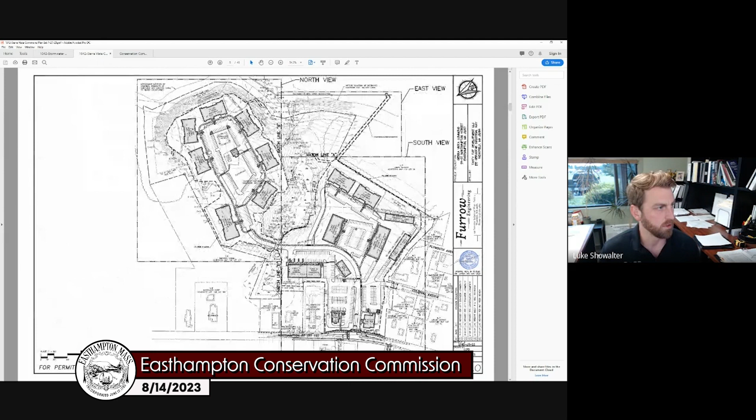So that space was converted to green space, which includes grass lawn and some additional trees. We also removed one of the residential buildings entirely. The building that was back here in this area was removed completely, as well as all associated paved areas, including the driveway, the parking, and the walkways. It also eliminated the need for the stormwater basin that was back there as well.

And since this was one of the areas that would have needed to be cleared for development, eliminating this building contributed to the reduction of tree clearing by 1.3 acres. So that's 1.3 less acres that will need to be cleared.

Although we removed a residential building, the number of proposed residential units for the entire project didn't change. Half the units will replace the retail space that was removed from building 14. The other half will be added to one of the proposed residential buildings over in this area on the eastern side of the project. As you can see, the footprint increased on that building accordingly.

The 3 residential buildings to the east were moved. These 3 buildings here were moved 10 to 15 feet further away from the adjacent slopes. Also, initially there were 2 restaurant pad sites proposed on Northampton Street, two 5,500 square foot pad sites. Now one of those sites, the northern site, is proposed to be a 3,200 square foot bank use. So there was a reduction in retail space there as well.

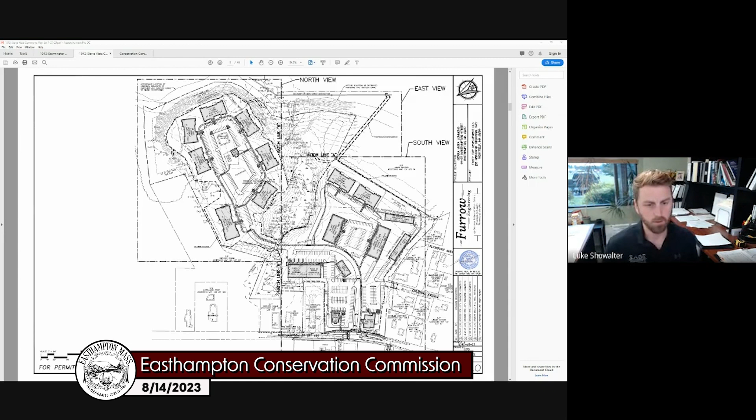So those were all the changes that were made over a month ago. As a result of the peer review, in general there were no significant changes to the plans or the stormwater management system. The only change of note would be that basin R1 was reduced in size. I'll pull up that one.

This basin over here was reduced in size in order to move it further away from the adjacent slopes. That's the only major change of note. I wouldn't call it major, but it also reduced the amount of tree clearing necessary in that area by 5,000 square feet, which isn't too significant, but it's something.

As Matt mentioned, we received a second round of comments from Beals and Thomas late last week. A majority of the initial comments they had seem to be addressed by us. We have reviewed their remaining comments, and we believe them all to be addressable without any substantive changes to the plans. We're currently working on putting together a response, and we anticipate having all their comments addressed within the next week, hopefully.

Thank you. I had some specific questions looking at the most recent August 9th letter. Comment number 2 deals with the Manhan River being a cold water fishery resource and the critical areas criteria. It's noted that the applicant's response and revisions meet the requirement of DEP Stormwater Standard 6. Can either of you please clarify what the revisions were that addressed that?

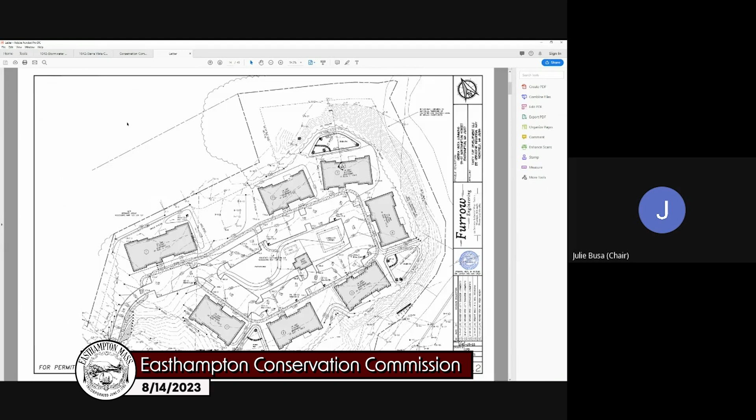That standard has specific pre-treatment requirements. I guess the project has had a couple iterations. If that was an initial comment, I think in the most recent stormwater plan, they have the required pre-treatment before they're infiltrating. I guess we had always seen that, so the initial nature of the comment from DEP, kind of unsure what they were looking for. But in our opinion, they're meeting that standard 6 with their current design.

Okay, so there was no change. Not a substantial one that I'm aware of, no. Okay. Once we got involved, I don't know if there was a change to a previous iteration, but since we've been involved, it seems like it's been compliant.

On comment number 4 regarding the tree line perimeter sediment controls, your initial comment, Matt, said that Beals and Thomas could not accurately evaluate the proposed impacts to resource areas and buffer zones, and were holding further comment on impacts until additional information was provided. Did you have further comments once that revision was made to show the limit of work and perimeter sediment controls? No, we're all set with that now. I guess the initial limits were unclear, and now the limits are more greatly defined. We're comfortable with it.

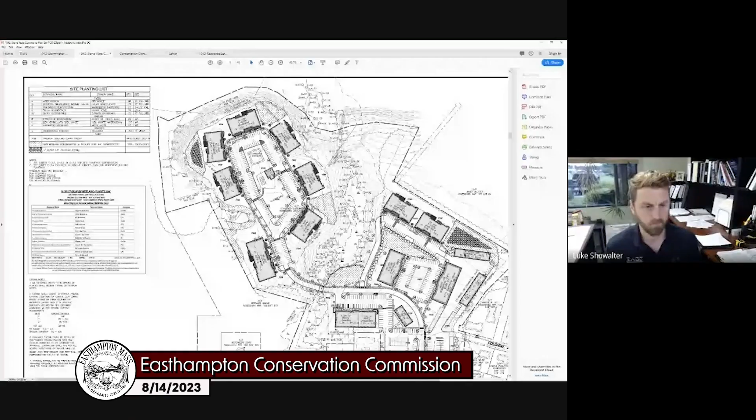So this change was in response to one of the Beals and Thomas comments. It's only in the area of the bottom of the infiltration basins, and I believe it was to aid in infiltration. It's a 4-inch layer of 1.5-inch crushed stone. This is that hatch, this is what it looks like. On the plan, that crushed stone is located just in the bottom area of this infiltration basin, as well as over here in this basin.

So that's the only area that you're placing crushed stone? Correct, yes. You're suggesting that in lieu of planting? Previously that was a grassed area.

So the crushed stone, Beals and Thomas suggested that it should be crushed stone, so that's why we made that change, so that it's replacing the grassed area at the bottom of the basins.

Yes. Was that the intent, Matt, or were you suggesting that should be a layer underneath the soil media and plantings? Yeah, I'm not recalling making that comment off the top of my head. Trying to buzz through these quickly here.

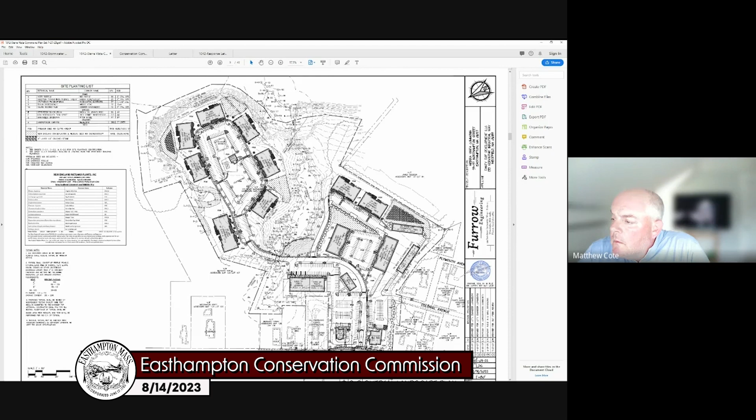I mean, typically what we see in these basins is it's hard to get vegetation to establish, so the fact that they could have a stone base could be beneficial instead of it always being mucky. It would be something more stable.

It was actually in response to comment 15A, out of the Easthampton ordinance. So that's not necessarily a comment or suggestion we made, it was keeping in line with your ordinance.

Or with clean stone or filter fabric. Usually there's a layer of ground fabric or stone, and they chose to go with stone. Typically, though, that would be...

When I've seen similar designs, certainly if you chose filter fabric, it wouldn't be on the surface, it would be a layer underneath. I assume the same was intended for the stone, not that it would be the finished surface, but a layer to allow for increased infiltration and pore space underneath the finished surface. We're happy to look into changing that.

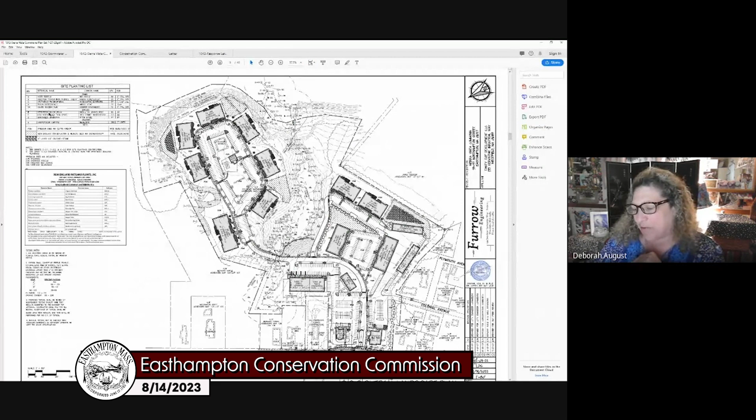You switched out the tufted grasses, which we thought could be invasive, and replaced it with blue joint grass. But the botanical name belongs to big blue stem grass, and the common name belongs to a separate botanical name. So are you doing big blue stem, which is Andropogon gerardii, or blue joint grass, which is Calamagrostis canadensis? You have two different types in the one line.

So which will you be using? This is another species straight out of the Mass DEP Stormwater Handbook.

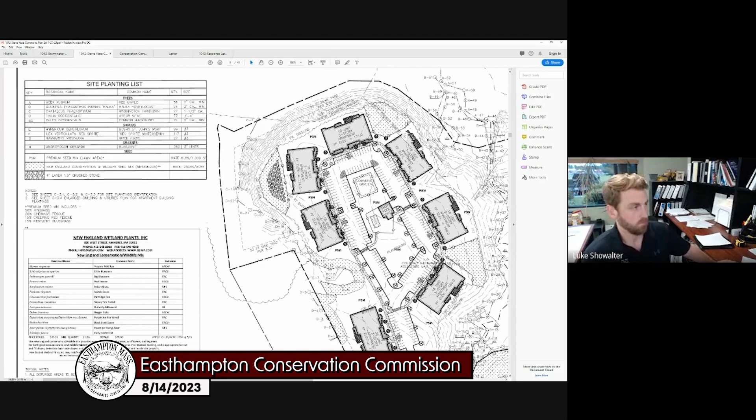It calls out that botanical name and blue joint. Maybe it's a mistake, I can look further into it, and I would imagine it's the botanical name. But we chose this one specifically because it was native. It has higher salt tolerances, and it's good for wildlife. But I can clarify that and get back to you. So you'll let us know if it's the big blue stem or if it's the blue joint?

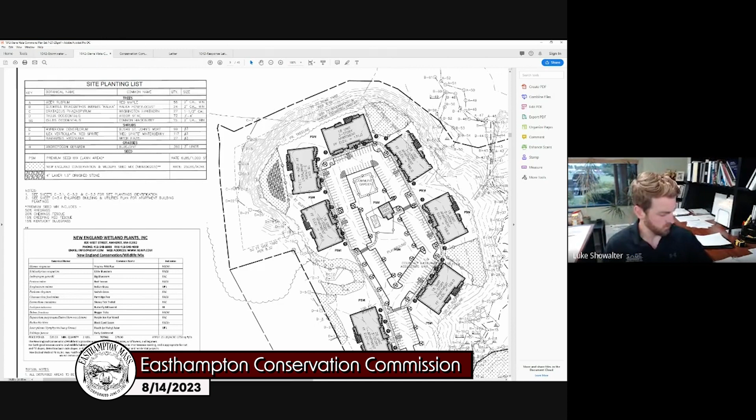Yes. Okay, thank you. That was it for my questions. Okay, thanks Deb. With that, I'll open it to questions or comments from the public.

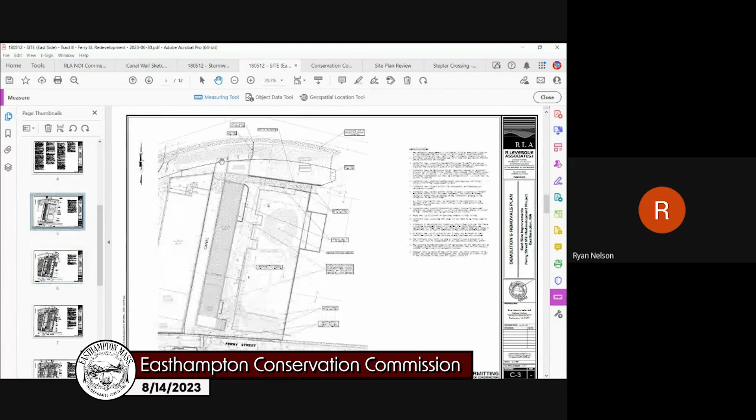So as Julie said, Ferry Street Mills, this is the east side referred to as Tract 2. Tract 1 has been completed and we got a certificate of compliance for that a month or two ago. For Tract 2, we're proposing the demolition of the existing building along the canal. There's also a lot of debris on site and various stockpiles of material that's going to be removed. Before I go on, there's, as everyone knows, a canal that bisects the site. This would be Tract 1, the west side, and Tract 2, the east side.

So previously, under the last notice of intent, we were proposing to replace or rehab the building along the canal, but that's no longer the case. The plans have changed. The building along the canal will be demoed, and a new 75 to 100 unit residential building will be constructed farther to the east on site.

And the way that's going to work is, if we look at the grading sheet here, the entrance from Ferry Street will slope down. You can see these proposed grade contours sloping down along the building and then wrapping around to the canal side of the building, where there will be parking available as well as parking underneath the building. Due to the elevation changes on site, there's a couple sets of retaining walls that are proposed.

There's a retaining wall located along this eastern edge of the parking, and that's going to provide for a pedestrian path to connect Ferry Street to the existing bike trail at the rear of the site. So this is going to be an elevated but still sloping path above the parking or drive aisle that's going to connect Ferry Street to the bike trail. And then we also have retaining walls proposed over here between the lower tier parking area and the front entrance.

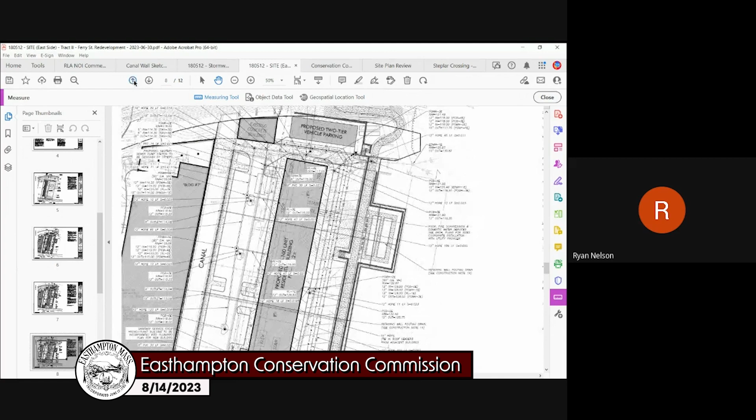Jurisdiction wise, we are within the buffer zone to the canal. Let me find the sheet that shows it. The 100-foot buffer zone line pretty much goes down through the middle of the tract 2 site. So the proposed building is partially located within the buffer zone, the parking area to the west is in the buffer zone, and this side of the property would be out of the buffer zone.

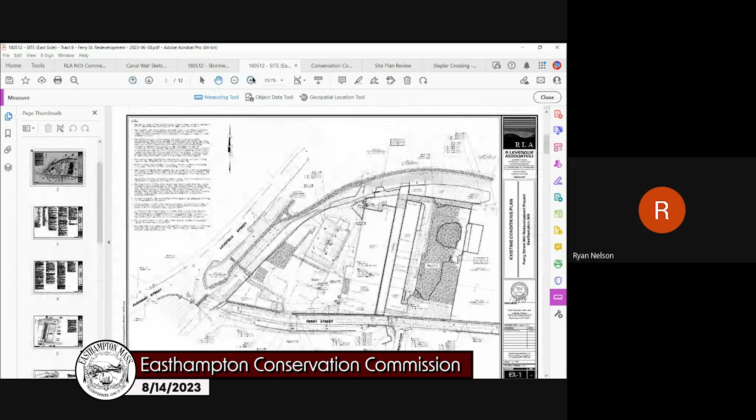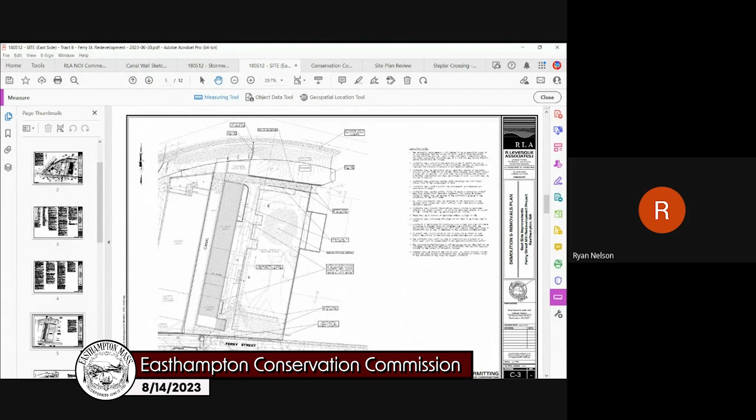The site is also within bordering land subject to flooding. I believe the elevation is 122.3, but I can confirm. Yep, the 100-year flood zone elevation on the 88 datum is 122.3. Similar to the previous proposal, we are taking account or credit for the removal of the existing building, since that was in existence well before the FEMA flood study.

Due to the grading on the site, we are proposing a cut to existing grade on the majority of the drive aisle and especially the wraparound at the back, in addition to the drive underneath the building that's going to be open, so floodwaters could enter that. We're creating a net surplus of comp storage on site. So not a whole lot of changes in terms of how much we're developing, or flood zone impacts, or buffer zone impacts, just a different reconfiguration of the proposed building and where the parking on site will be. Happy to answer any questions you guys might have.

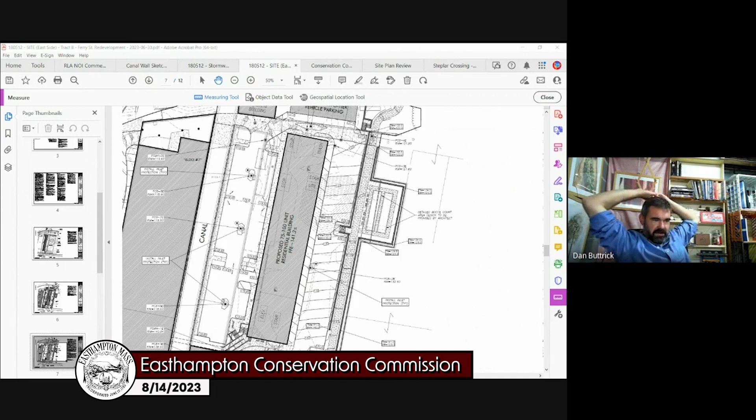So last meeting, the one question I remember walking away with was that right now there's the two buildings close up against the canal, and moving the building away will increase sun penetration down to the canal somewhat. So we're just wondering if there could be a way to squeeze some trees in along the canal edge, recognizing that there's really not much space at all with the way everything has to lay out there.

Right, no, that's a good question. Yep, that was one of the comments Cassie had sent over a few weeks ago, and I'll read RLA's response to that.

Cassie's comment to us: consider and speak to the possibility of adding plantings along the wall of the canal that will be newly exposed, to try to offset the loss of shading to the canal water from the building removed. Either propose some plantings or explain why this is not feasible.

RLA's response: the canal is incised approximately 15 feet below existing grade, and some shading will still exist under proposed conditions. The anticipated increased sunlight exposure of the canal due to the removal of the existing building will be mitigated by the construction of a proposed multi-story building, which will be shifted approximately 70 feet directly to the east. The canal goes through a historic mill complex, and the canal is concrete and does not contain a natural substrate. Therefore, efforts to provide shading are not anticipated to have the same benefits as compared to a natural stream corridor.

Additionally, proposed tree plantings along the top of the canal wall pose a risk of long-term structural damage through their roots, exploitation of potential cracks and voids in the existing wall, and the proposed sidewalks. In lieu of planting trees, the applicant has proposed to install hanging planter baskets along the top of the canal wall ornamental railing.

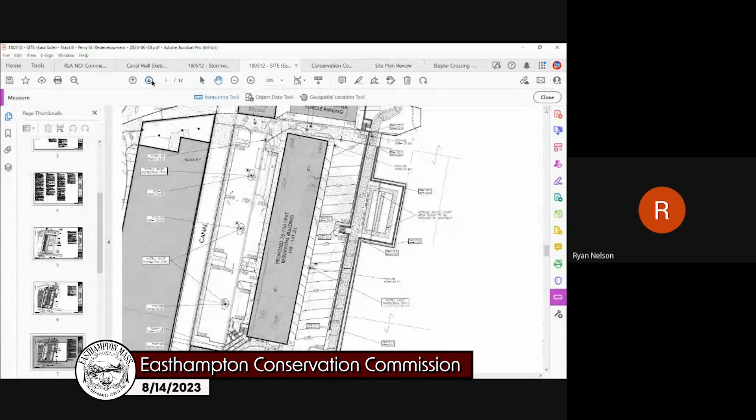Thank you. And you are showing some trees in those little parking lots. A couple on the parking islands, yes. Yep, yep.

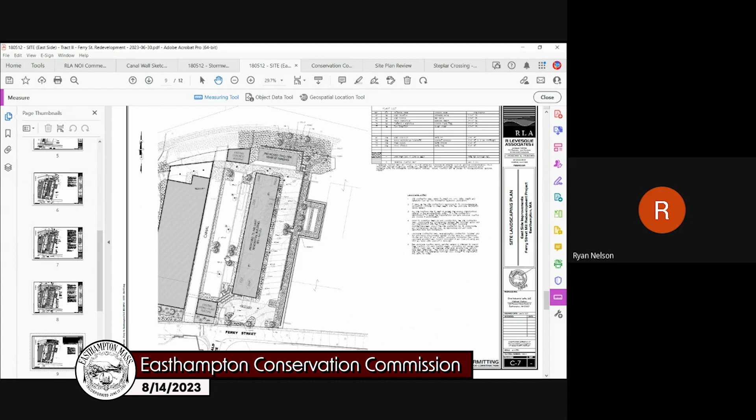Why are those trees not a concern relative to the structure of the wall, but others along the canal would be? We have to meet parking standards, and I believe that's a requirement under typical site plan review for parking. That didn't answer my question. Yes, they would pose a risk, but we're trying to minimize the risk by only providing what is necessary to satisfy zoning.

Plus, they're as far away from the wall as possible, it looks like. Correct.

Is that really 15 feet from that elevation down, because it's hard to get a sense of it from looking at the site. Yeah, the bottom of the canal is like 103.6 or 7, and proposed grade will be 120 point something. So it'll be actually more than 15 feet under proposed conditions.

Did we talk about whether repairs or maintenance to the walls are being performed as part of these projects? I don't remember. Mike, are you available to speak to that?

Yes, both sides of the interior of the dam of the canal walls will be repaired. Those are stone masonry walls or concrete walls? They're granite foundations from the concrete bottom. Obviously it's probably well below the concrete bottom of the canal. Up about, it varies on each side, but they're probably 10 to 12 feet. And then there's a combination of concrete and brick.

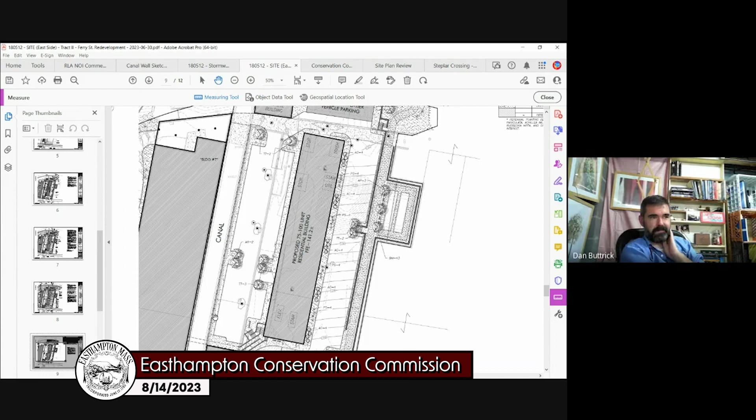I believe in the original approvals we had required some, I forget if it was netting that we landed on, but we had some protections for capturing anything that would fall into the canal. Is that still part of your proposal? We cannot use netting. That won't work because it's a concrete bottom.

We're basically going to shut the dam off. We're going to shut the water off so that we can get in there and clean, because there's about 150 years worth of rubble and brick and steel pipes, and we're going to completely clean everything that's in there now, clean it out.

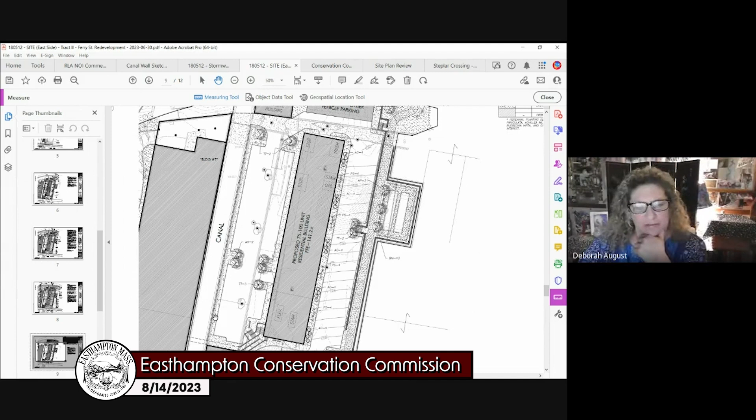Is that something that was discussed at the last meeting? I don't think so. No, I don't remember discussing that. I think there was a discussion about cleaning the canal many meetings ago, cleaning out some of that debris, but I didn't hear anything about stopping the water and driving in there. That's all.

Yeah, the idea is in the fall, if we can coordinate this correctly, that's when the water is the lowest and the slowest throughout, coming over the dam and in the canal, and that's like the prime time to be able to do that work. How has that been accounted for in your impacts analysis?

Mike, am I correct that you have control and ability to control the water level of the dam or the impoundment area? Correct. So in our deed, we have drawdown rights, hydroelectric rights, water flow rights, and a handful of others, because we own the majority of the pond, and the other part of the ownership is the city's. Gotcha.

So would you anticipate on a demolition day you would cease flow, work on demoing the building, and then clean as necessary, and then resume flow? Or are you expecting it to be done in one shot, or how long would it take? No, I mean, it would take some time.

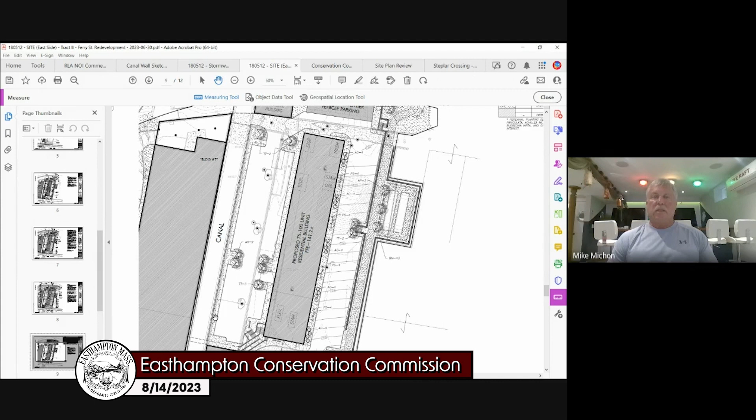So what we would do is either use some sort of pump system to divert the water around our canal area and basically go around the site and come back in where the bridge area is. Or we would use an ADS pipe and let it run independently from the dam along the inside of the canal, then flow out again beyond where the bridge is. Okay.

And are those temporary impacts to the resource areas currently reflected in your calculation of impacts? Because I don't think anything that dramatic was proposed or approved under the prior NOI.

We haven't, you're referring to impact. I guess I'm just unclear as to what. Dewatering is considered an impact, regardless of whether it's temporary, and you're proposing to dewater the entire canal, it sounds like. It's not dewater, it's diverting. It's dewatering for the purposes of our conversation and permitting process.

Just as if you were to draw down the pond to dredge it, that would be dewatering. You'd have dewatering impacts for the entirety of the area of the pond. Okay, so would the commission be looking for a dewatering plan or flow diversion plan, or just additional detail on that? We would definitely need to see a water control plan, but you're also going to need, if it's not already in your tally of impacts, to update your impacts, because your assessment of resource impacts is not accurate if you haven't accounted for that.

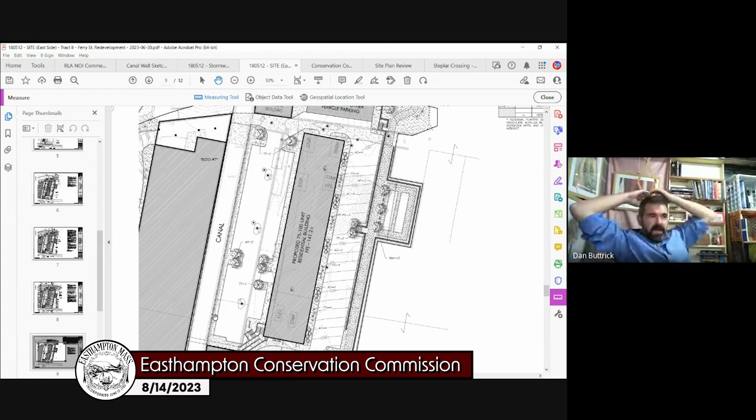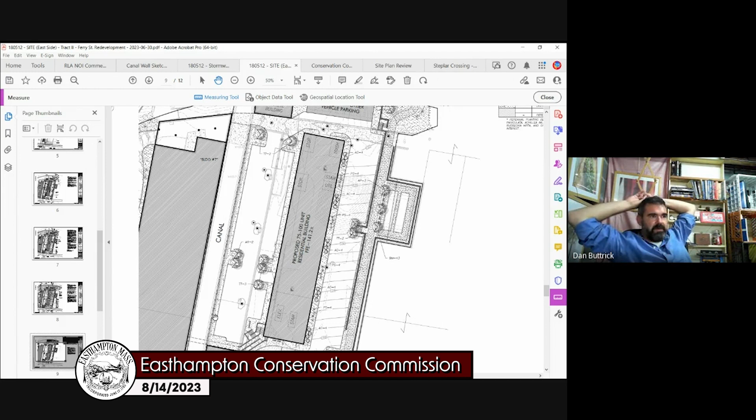And there's a lot that raise a lot of questions too, like on the other side of the rail trail, it's all endangered species habitat. So, not to, once you get out of the canal to the other side, change the water flow regime. I just don't know what the species is. I don't know what the other inflow sources are to that area. That would all need to be coordinated.

Well, we'd still be discharging within the canal, just past the building demolition area. There's a possibility too. How long is that length of canal? Maybe, I think the building's what, like 300 something feet, so the canal's probably 400.

You're probably also talking about tripping the 500 linear feet of bank threshold for MEPA by doing this that way. How are we disturbing bank? Because if you're dewatering the bank, I think they would consider that temporary impacts to bank.

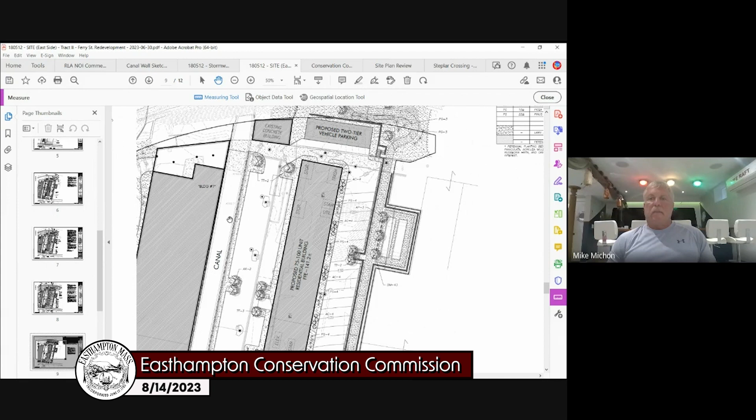I'd have to think that through more, but I think that's how it has been interpreted in the past. Yeah, having been forced to go through MEPA several times for things that I did not think would have had MEPA issues with. Anyway, I think you'd have to look at David Follis's previous assessment on this, because a canal has a whole different, especially with a concrete bottom, is looked at differently.

The fact that it's concrete does not matter. It's still considered land underwater. It's still considered bank. The previous determination made was that it would not be considered perennial and would not have a riverfront, but that doesn't change any of the things we're talking about.

Trying to remember my discussions with DEP on this a couple years back when this was originally getting permitted. Some of the pathways that DEP suggested were that, I don't have the language right in front of me, but off the top of my head, I remember the way it's worded. If you look at performance standard thresholds for land underwater or bank, if you exceed those thresholds, usually it requires a wildlife habitat analysis unless the commission deems the resource area is insignificant.

So that would be our approach in this circumstance, if that was considered a resource area impact. That still wouldn't get you around the thresholds that you'd be tripping for MEPA or the need to report them as impacts. We can't change any of that, regardless of whether we think it's significant or not. And frankly, I don't know, particularly because of the downstream habitat issues that Dan mentioned.

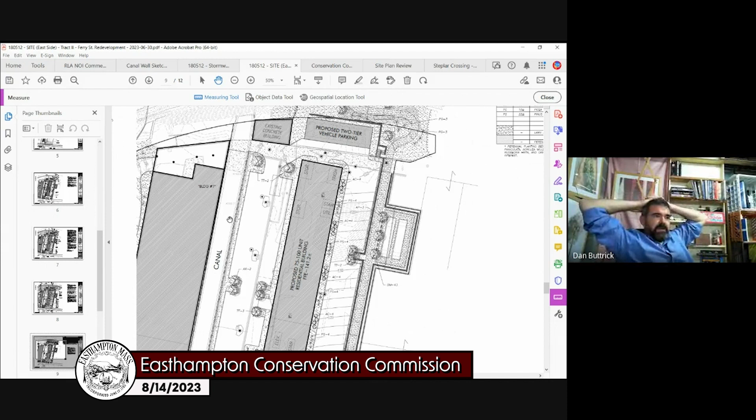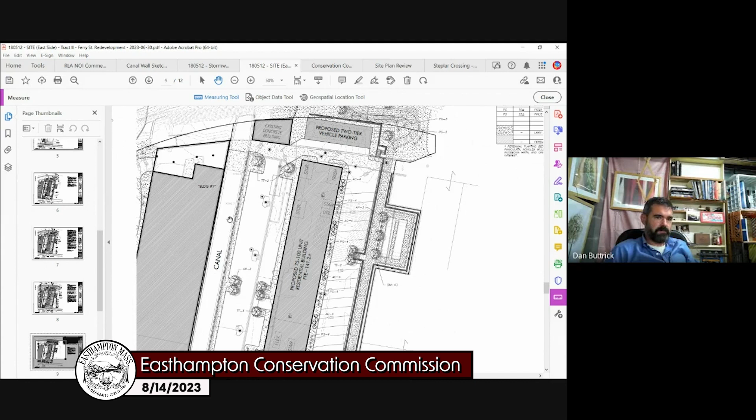Yeah, I guess if you're diverting, just kind of diverting and then discharging, like at the downstream end of the canal, maybe that concern goes away. But that just does raise a lot of questions. Yeah, this is the changes you're proposing on the surface, I think, are not of significant concern by and large. But this is a significant change that we had not permitted previously or discussed previously.

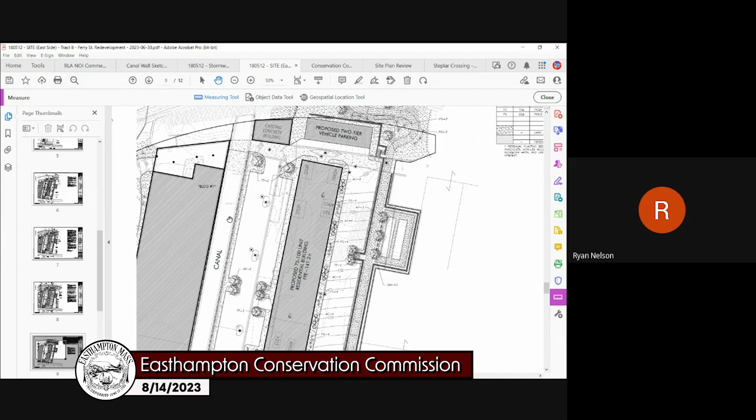Okay, so I'm just trying to get a grasp for what the commission is looking for so we can provide more information. You're going to need to recalculate your resource impacts, thinking carefully about what does and does not apply, and then see if you trip MEPA. If you trip MEPA, you're going to need to go through that process, and so on. But the first step is going to be recalculating your impacts and describing what that process is going to look like so that we can all reflect on it fully.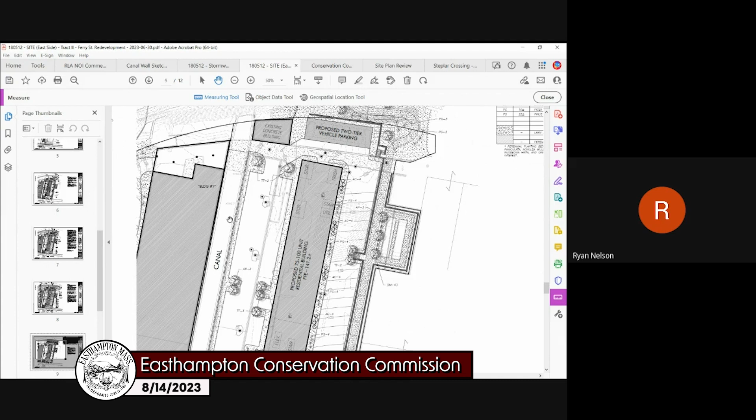It's our opinion, the resource area of bank and land underwater, we believe to be, I know the commission decides, but our argument is that it's insignificant. There's no habitat, there's no wildlife or. It doesn't matter, Ryan. It's still a resource area under the Wetlands Protection Act. We have no authority to change that. Canals are treated differently, but they're not excluded as resource areas.

I mean, yeah, and having not seen it, if it was a concrete bottom, but it was covered with the accumulation of a lot of material over the decades, it may be serving, or maybe providing some kind of benefit, even if it doesn't look good and is junk. Right.

Do you want to take some time to think that through and we can continue? Sure, yeah, I'll have to do some more research on that. Was there anything else that folks wanted to discuss about the project tonight while we're here, or shall we just put it on hold?

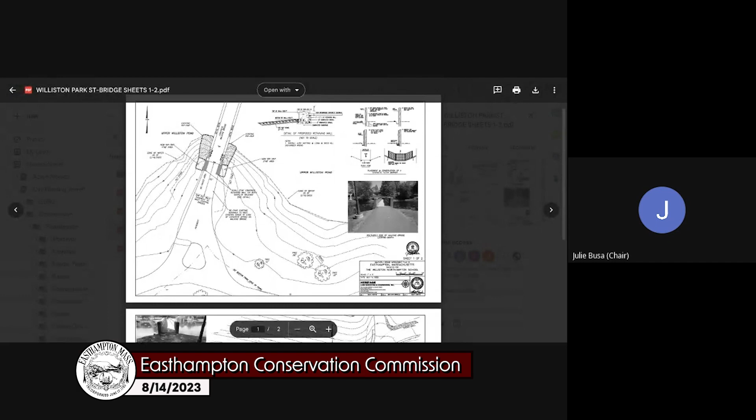Yes. Okay, Mark, you want to start with sheet 1 or 2? Sure, yeah, sheet 1's great. So, thank you, Cassie. I'm not sure why mine's not working, but so this is, sheet 1 is showing the existing sidewalk, which is located on the southerly side of the pond. And the issue is twofold.

One is there's a major tripping hazard as you go from a transition between the bituminous concrete walkway and the concrete surface of the bridge itself. On either side of the bridge, there is currently failure of part of the sidewalk in small areas on either side and erosion from major storm events on either side.

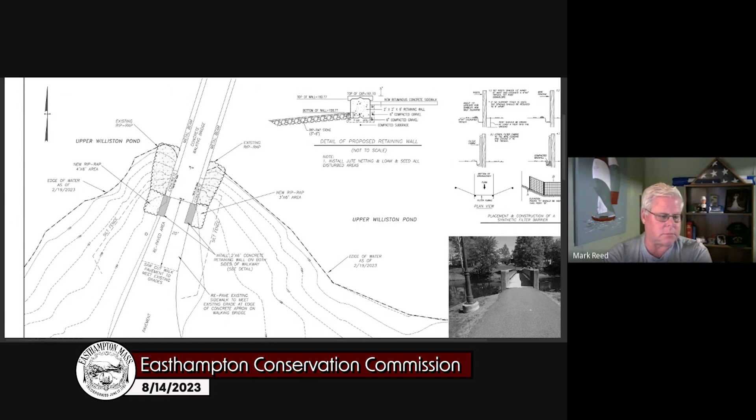So on the south side, we are proposing to install 2 foot wide by 6 foot long concrete retaining walls with a cap. They're kind of shown in the hatched area on either side. Then saw cutting and removing the existing pavement for a distance of 20 feet on either side of the outside edge of the retaining wall, there would be riprap proposed.

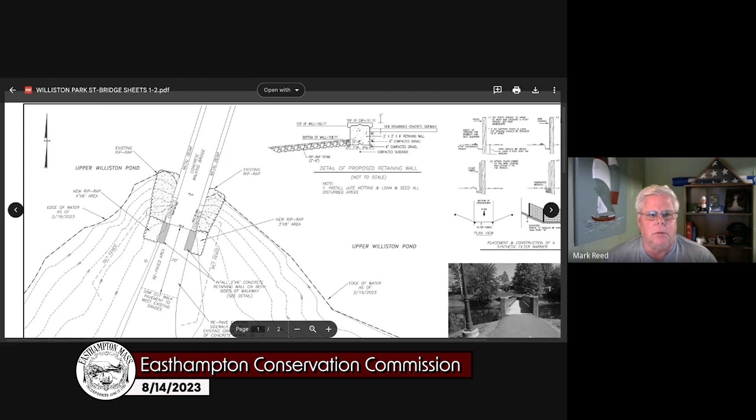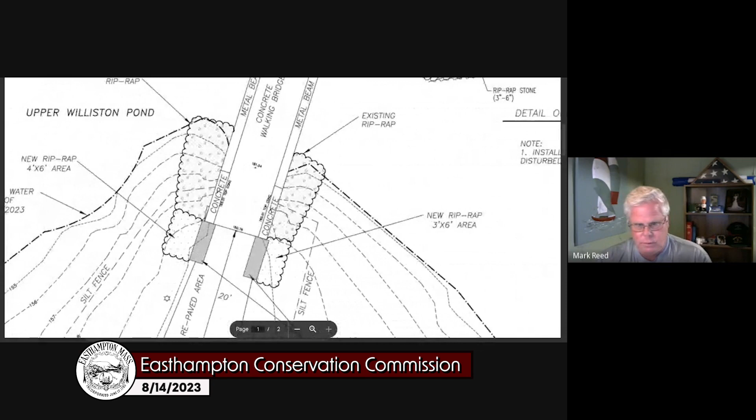And all the areas that are disturbed during the construction would be reseeded and maintained. We are proposing silt fence to be installed in the perimeter to ensure that during construction no erosion occurs. And if you can zoom in the picture, you can kind of see in the lower corner there, we inserted a picture for you of what we're talking about. You can see how both edges are really rounded.

We had a meeting with Hal and Cassie out there, and I know Cassie has a couple additional pictures, but you can see how over time that asphalt walk has just settled. So we want to try to reduce the tripping hazard and fix the long-term erosion. And you can see how the grade drops off on either side.

On the north side, if you switch to the other plan, similar to that, we are not proposing any concrete retaining wall, but we are going to repave 20 feet of the walkway.

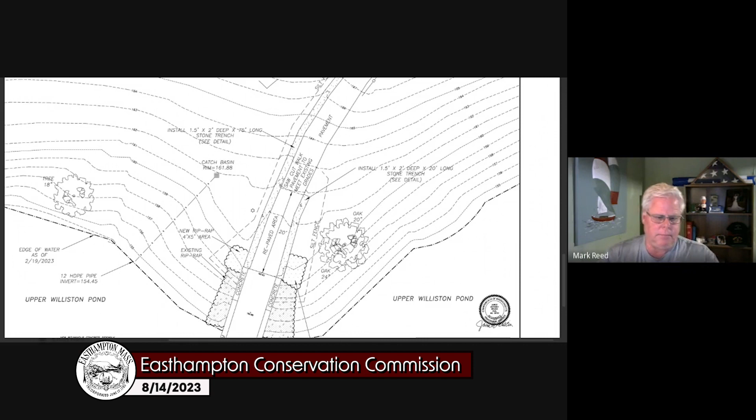But on this side, because the grade is such, we're going to install a 1.5 foot wide, 2 foot deep stone trench. On the right-hand side of the plan it would go for 20 feet, and on the left-hand side there's a steep slope you can see by the contours. It would continue up until where the sidewalk splits, shown on the very top section of the plan.

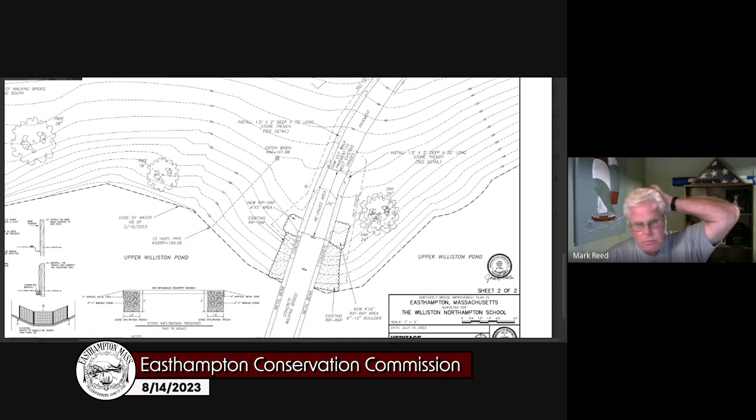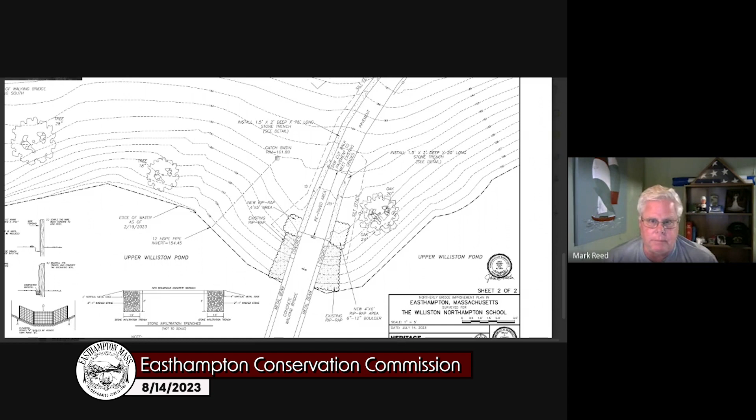In addition, we're going to put riprap and some large boulders, 6 to 12 inches in size, to facilitate slowing down any water that comes down the hill. It's quite a steep slope coming from the building on the upper section, and installing that and adding riprap to that area will stabilize everything.

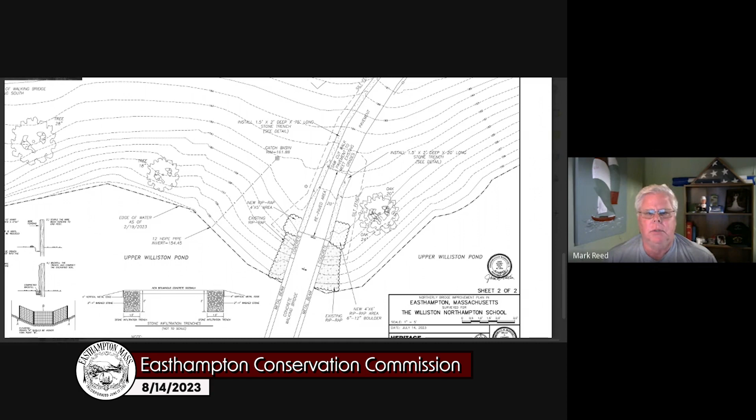Again, silt fence would be proposed during construction, and the rest of the walk going up from the 20 feet is fine. There's no issues with that, it doesn't need to be repaved.

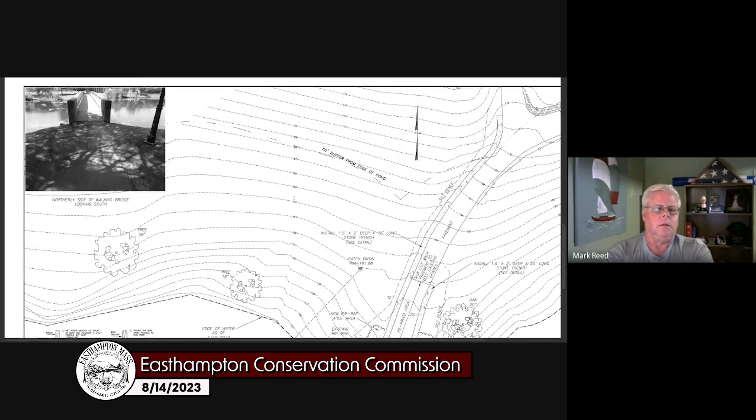Again, the upper left-hand corner of the plan shows a photo of it coming down the slope. Not a great picture, but you can see how the blacktop is failing and there's a tripping hazard at the concrete as it enters the bridge.

I'm sure Cassie has some nice colored pictures too that she could share, which would lend itself better than black and white. Yeah, I can share those whenever the commission wants.

Hey Mark, did this come before the commission before, or was it just... I remember, I swear, like 10 years ago it maybe was coming up as a problem, but it was like something in the future. And now I guess it's the future. Did we permit something? Correct, we had an informal discussion with the commission. I don't know, maybe it's been 10 years, Dan, I'm not sure, but yeah, it's finally gotten more to the forefront to try to fix it. So yes, it may not have been 10, but it was like more than 5. Yeah, it's less than 20. So it's an ongoing condition they would like to try to get resolved.

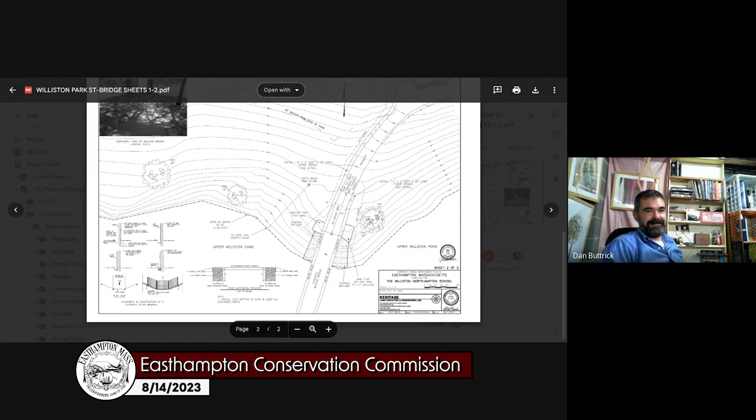I don't have too many questions about this one. My only real thought is it would probably be in your benefit, and an improvement from our perspective, to add some additional vegetation other than just mowing down to the edge there. Has there been any consideration of adding some shrubs or something on the pond side of your project?

Yes, we've talked about that, and we feel we could incorporate some plantings within both of those areas. That would certainly make it a better project from my perspective, and I think it would work in your favor in terms of holding the slope in place, holding your material in place, and preventing erosion long term. Maybe even keeping some of the kids from throwing rocks in that particular direction. Maybe you could plant some very thorny vegetation.

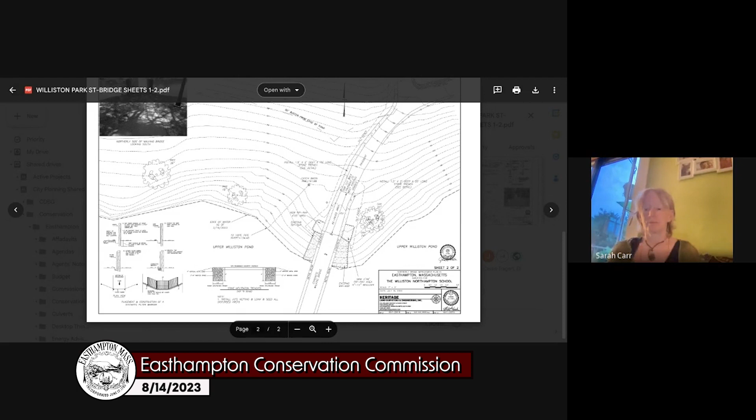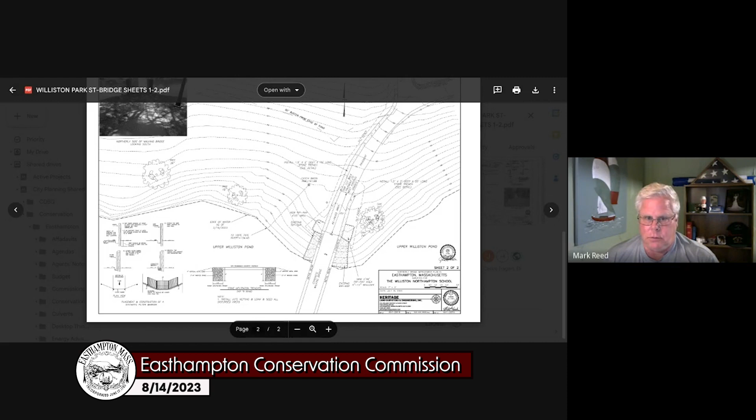I have a question. I just wondered, it doesn't look like it from the photos, but I wanted to verify that in the process of removing the current pavement or putting in the troughs on either side, if any trees would be affected or removed. No, there are no trees to be cut. This area right now is mowed as grass on either side until you get to the rock riprap areas highlighted on the plan that are existing. So yeah, there's no trees to cut. Thank you.

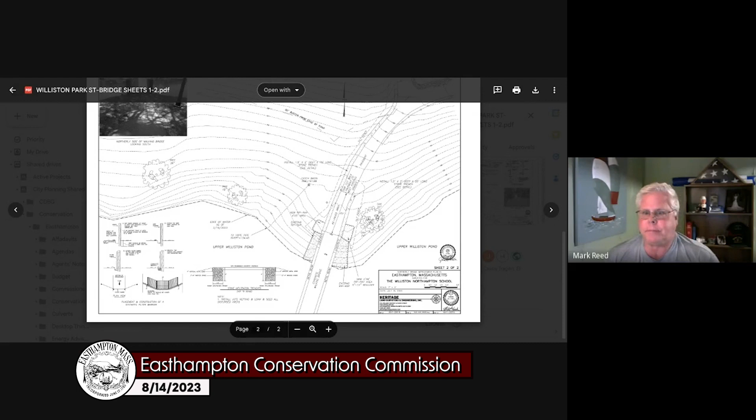Other questions from the commission? Are there any other conditions we want to add to the requirement?

I would think the standard 48-hour construction notice. You're showing silt fence, is that correct? Yes, silt fence. Yeah, that looks to be in order.

I don't think anything else on my side. What are other standard conditions that I may be forgetting? The notice and the controls are really the big thing. Really, they're just fine, I just want to clarify.

Were you suggesting that you require plantings as part of the permit, Julie, or just a recommendation? The plantings? Yeah, if Williston is amenable, I suggest that we write it in as a condition.

If you all can hear me, we would be glad to do something to improve those areas. Great, thanks, Brian. And do you want to note just native plantings or? Yes, we would want to note natives. Beyond that, anything that goes in is going to be an improvement in my eyes, so I don't feel the need to specifically see what is proposed unless others do.

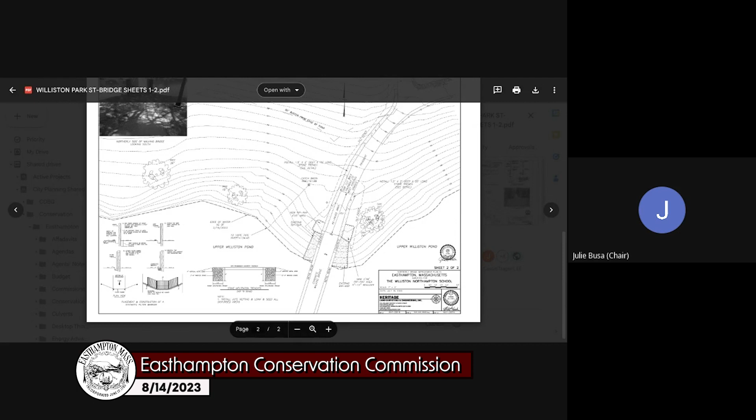Any other comments? How long will the project take? So looking at it, I think it's probably about a week, right, Brian? I would hope so, Mark. Obviously, we'd be looking at a weather window to make sure we're not going to have influence from Mother Nature. And if it's something we can do before the kids come back, we would certainly like to accomplish that as well, so we eliminate our concerns of foot traffic safety.

If there's no further discussion or comments, do we have a motion? I'll move to issue a negative determination, Type 3. The work described in the request is within buffer zone but will not alter an area subject to jurisdiction of the act. Therefore, said work does not require the filing of a notice of intent, subject to the following conditions: 48-hour notice to be provided and implementation of native plantings in that area. I think that was it.

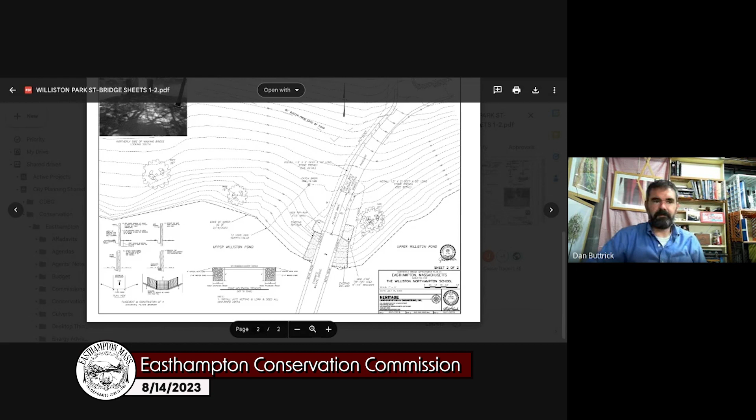And the erosion controls already shown, yeah. Yes. I'll second. All those in favor: Ryan, aye. Patrick, aye. Whittemore, aye. Weeks, aye. Carr, aye. August, aye. Motion carries.

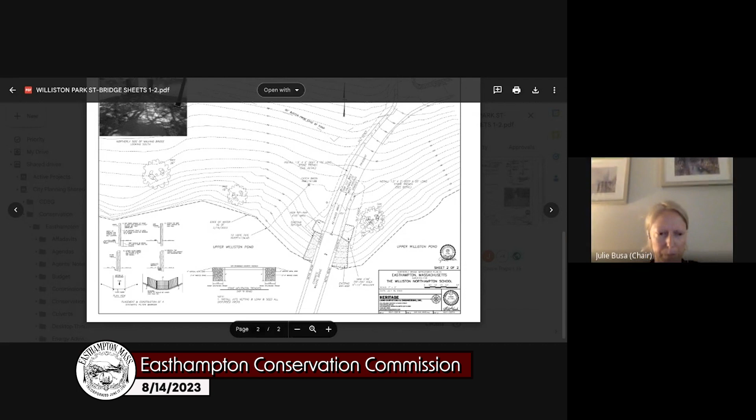All right, moving on to request for certificate of compliance. One Industrial Lofts LLC, 1 Ferry Street, Tract 2, Mass DEP file number 151299, Ferry Street Mill Redevelopment Project, Map 135, Lot 2. This was the original NOI for that project.

Are they still online, Cassie? Ryan is still here. My guess is that they're going to continue it. That is my guess as well. Is that, Ryan, what you'd like to do? Yes, that's correct, that makes sense.

Do we have a motion? A motion to continue to August 28th at 6 p.m. Second. All those in favor: Ryan, aye. Buttrick, aye. August, aye. Weeks, aye. Whittemore, aye. Carr, aye. Motion carries. Thank you.

Next is a request for certificate of compliance from Eversource Energy, 19B15/19B16 line right-of-way off North Street, Mass DEP file number 1510320, for upgrades to the utility line, Map 1.

We have someone here for this item? Yes, hi, Melissa Kaplan from the BSC Group is here. Cassie and I did a site walk. The project looked really good. We submitted our weekly reports. Can I share my screen real quick, Cassie? Yes, you should be able to. All right, great.

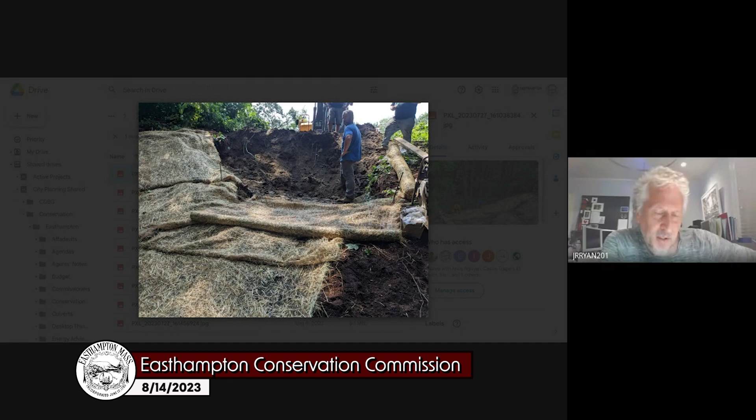Dan, do you know? This is not what I was expecting. They had on the drawing, there was a fabric described. I don't have the drawing in front of me right this second, but there was a fabric described from the manufacturer.

So presumably it was this one, but we are not the engineer responsible for knowing whether this is the appropriate fabric, whether they've selected the appropriate fabric for the use. We just requested that it last at least 2 years.

Yeah, I don't remember if we talked about it or if I was just going through it in my mind, but FES lifts a lot of times are done with coir fabric, which is super thick and resilient, and it stands up to quite a bit of river velocity if you've got that, but we don't really have that here.

We're just trying to keep the slope stable enough to let other things take over stabilization-wise. And so we talked about having like a 2-year biodegradable fabric, which I don't know, this could be, I guess. Right, that was my recollection as well, and I was told by Carlos that they did buy what was on the plan, which is a biodegradable erosion control fabric.

And I think the coir blankets are more durable and probably would get that better tautness and firm lifts like we were intending, but I don't have a lot of post monitoring experience. I don't know how well those vegetate if we were to seed underneath like we have in this instance, aside from the tubing plantings that were proposed to be staked in.

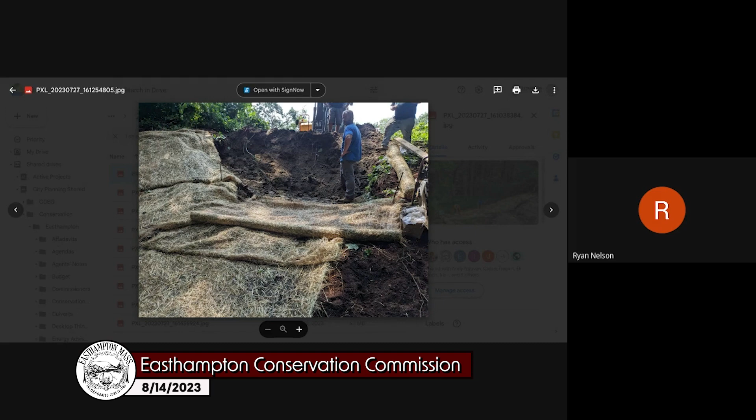Maybe, I don't know. How are they compacting the soil as they build each lift? I think Cassie was out there. I wasn't when they were doing it, but it looked like based on the pictures, they had a small plate compactor, jumping jack. They were lifting down there with an excavator.

Yeah, right there. Yeah, it looked like that's what it was when I went out there. This was from when I went out the first time that day and returned back, but I didn't see it in use. I thought that was on there too.

And in that picture, it looks like they're only going back a couple feet into the slope. Is that an accurate representation of what's happening? It's hard for me to say. I'm inclined to agree with you. I was more concerned about the face of each layer at that stage, but I definitely wasn't there to see how far back each layer went.

I would be concerned that if they don't redo it, like I totally get why Carlos doesn't want to redo it, because there's been a lot of redoing on this project, and he's spent a lot of money. But my concern is that those won't work, and the soil will erode, and then he'll have to redo the whole thing anyway, and it will be even more expensive and more of a project down the road if they don't do it the right way now. That's just my very humble opinion.